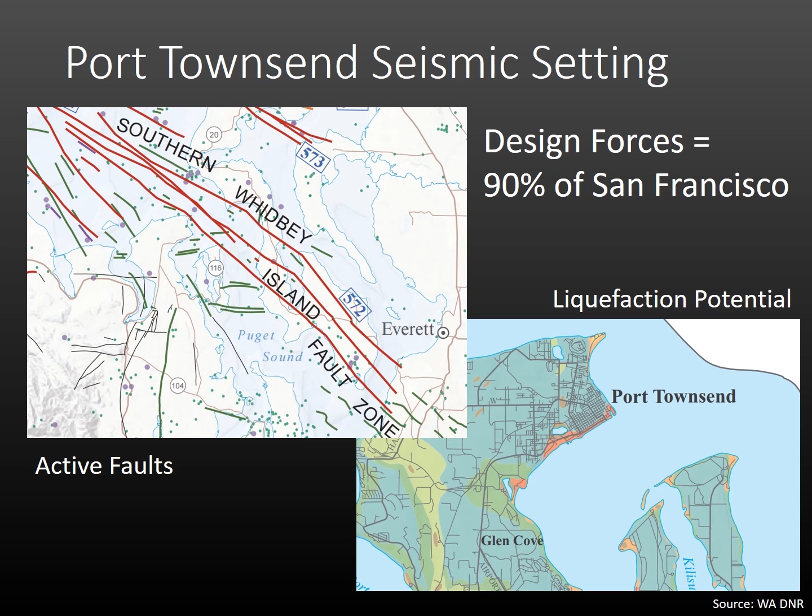So red tag means that after an earthquake, building officials, engineers, and trained professionals will go around and look at buildings and apply either a green, yellow, or a red placard. And just like on your stoplight, green means the building is relatively undamaged. You can continue to use it. Yellow means that you can only go in under certain conditions. Maybe it's just to go in and retrieve some belongings and come back out.

But red tagged, and I'll talk about this in the context of Christchurch, New Zealand, red tag means that you cannot use the building any longer. So if that's your residence, your place of business, that's a big impact.

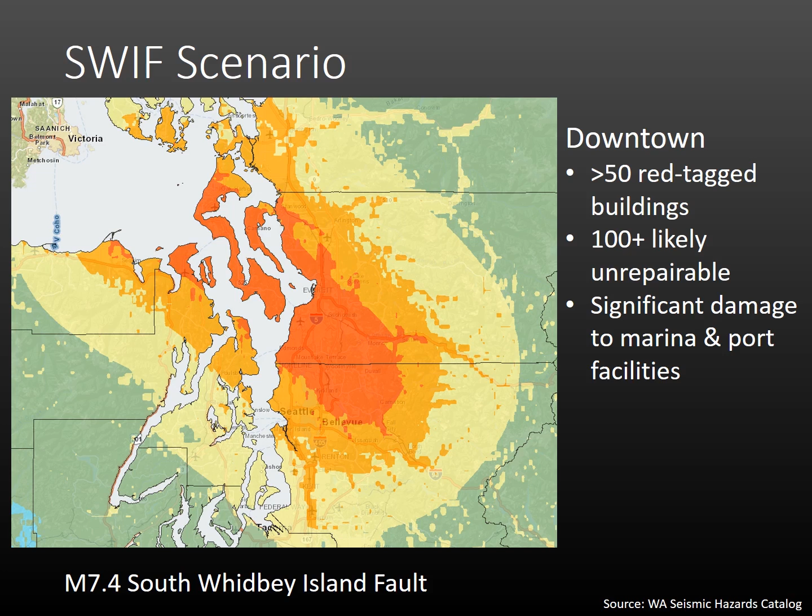A couple of the other presenters also talked about Nisqually. So I just wanted to kind of provide a frame of reference for those of us that were here at the time. I actually wasn't. I moved here in 2003, a couple years after Nisqually. Even though it was a magnitude 6.8, Brian mentioned it's very deep. It was 50 kilometers deep.

This is not the big one. When we're talking about the big one, this is not it. We did see some damage. Some buildings in Seattle on poor soil conditions, or that had just the right combination of ground shaking and soil conditions, did see damage, but it was not widespread.

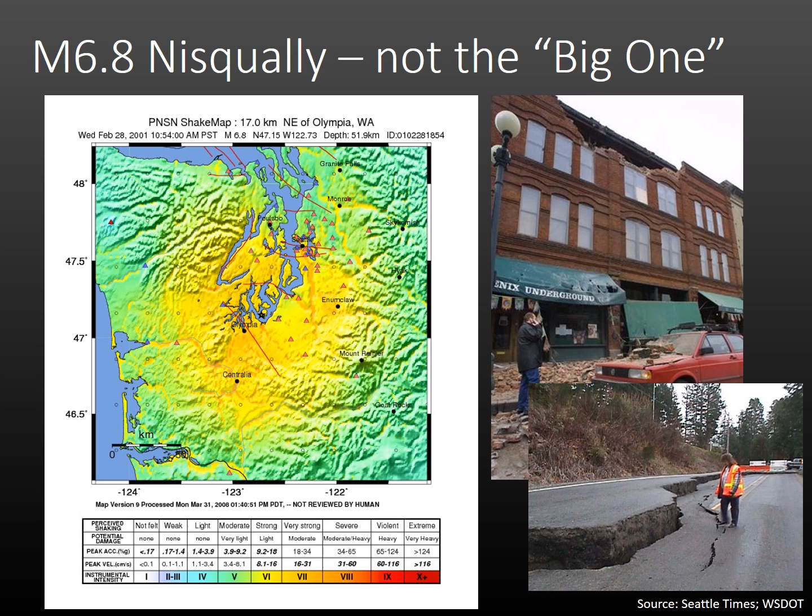However, if we take a field trip to Christchurch, New Zealand, and in particular the earthquake that happened on February 21st of 2011, you could consider this the big one. This is the big one for their central business district, for their downtown, for their city.

The effects are not as widespread as we would see from a Cascadia subduction zone, but I think this is a great chance to see how some of the buildings performed in that event and how it's impacted their recovery, how it impacted their region.

So this was technically an aftershock. In September of 2010, about, I think it was 30 or 40 kilometers to the west of Christchurch, there was a larger earthquake. It was magnitude 7 or 7.1, something like that. So that's what defines this as an aftershock, because there was an earlier event that had a larger magnitude.

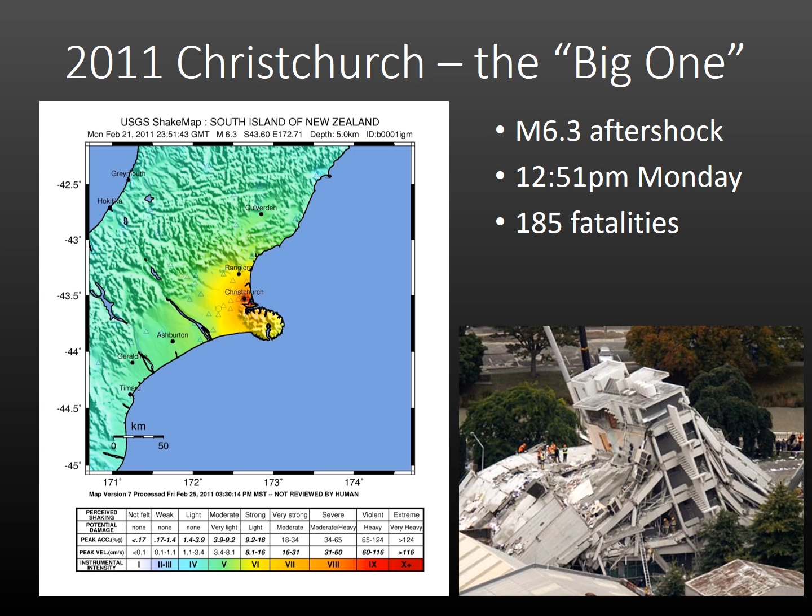No, this is not flooded. This picture was taken, I don't know the exact date, but this just shows that on this bare land there used to be buildings. 75% of the buildings in downtown Christchurch have been or will be demolished. I think probably by now the ones that were damaged and going to be demolished have been demolished. The financial impact is estimated at $30 billion US.

Christchurch and New Zealand were heavily insured, so a lot of this money is coming into the country from global reinsurers. It's provided a little bit of a boost to their economy because all that money is coming in, but this is a massive effort.

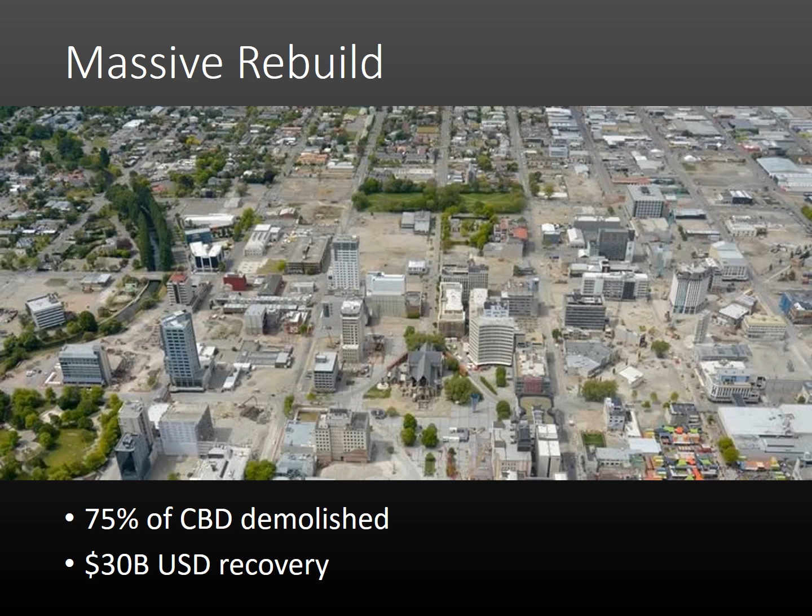So my company sent a team of 6 engineers to Christchurch. We do a lot of seismic design and earthquake engineering, so one of the best ways to learn is to go and see for yourself. This is almost a real laboratory for us.

We were in country for about a week, and we arrived approximately 10 days, or maybe about 2 weeks, after the earthquake. So some of the cleanup had already happened, but there were still a lot of buildings, and we could see how they performed, what worked and what did not work.

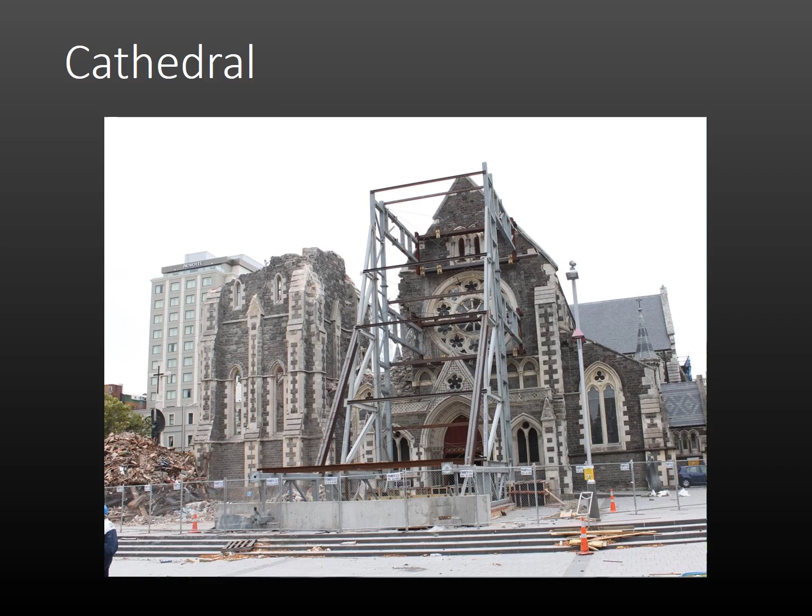The building had experienced a little bit of damage in the September earthquake, so I believe these shoring towers may have been put up before then. Some buildings had some damage, and they had put up shoring towers between September and February. But this is what we found. Here was the spire, and off to the side is what remains of the spire.

My understanding is the building is still pretty much intact. We saw that from the picture a couple slides ago. They're still trying to figure out, do they rebuild? How do they deal with this? It's a big cultural heritage site for them, so it takes a long time to sort through those decisions.

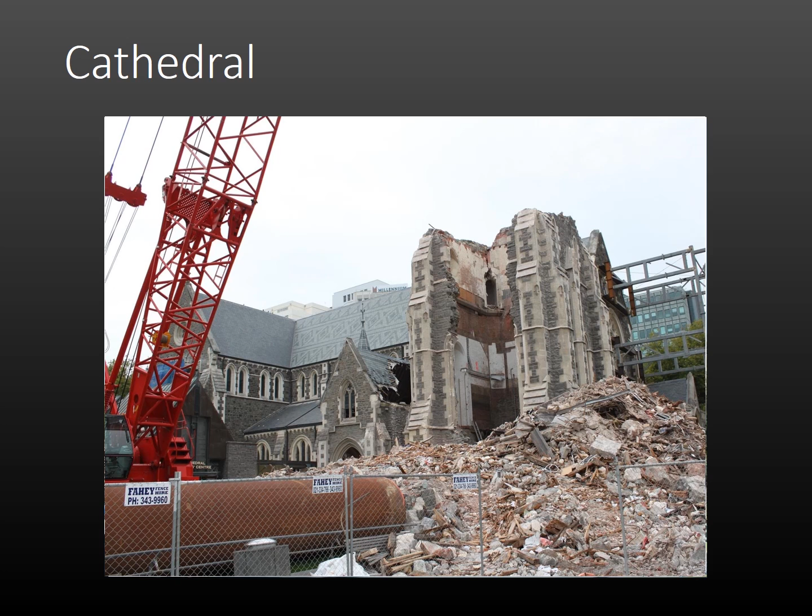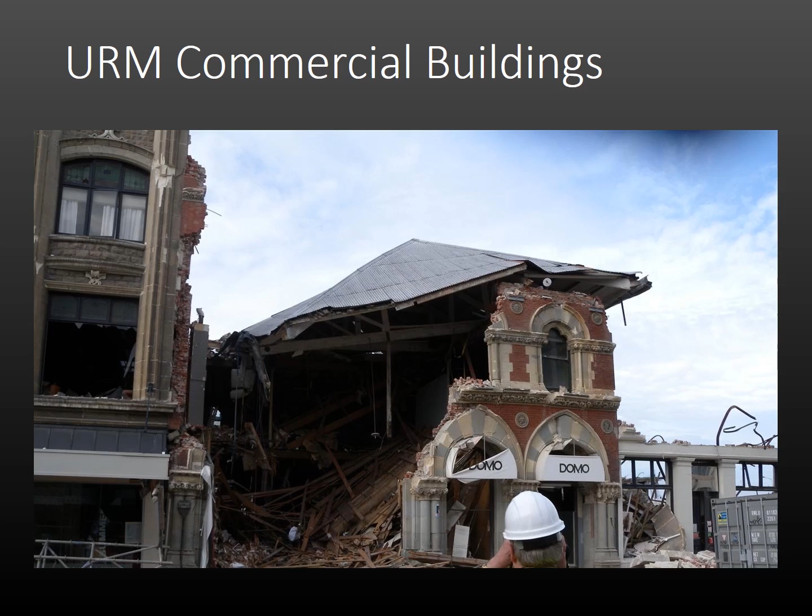Here's another example. Again, this is kind of the before view taken from a street view, and then when we arrived, this is what we saw. Obviously, there were probably some awnings that were hanging on here, and the streets had been cleared away, but you can get a sense of the storefronts, the defining features of these buildings have been severely damaged.

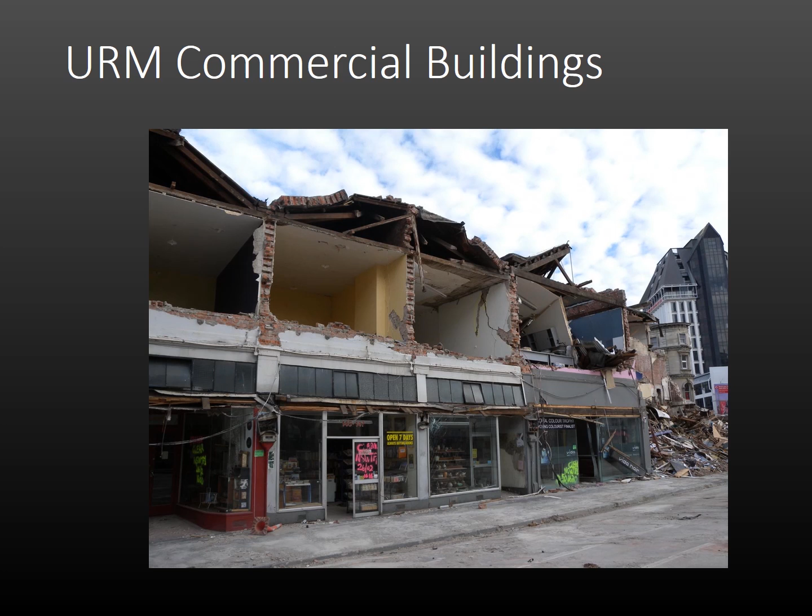Another construction type is reinforced masonry. A lot of schools and low-rise commercial type buildings are constructed using reinforced masonry. So this is kind of the H-shaped blocks that are hollow. They stack them up, they insert reinforcing, and then grout them solid.

This building actually performed reasonably well. I mean, it allowed the people to get out. It did not collapse. You would say that this all generally meets the intent of the building code, because the building code is all about life safety. Of course, this building is not economically repairable, so it was one of those buildings, part of the 75% of the downtown that has been demolished.

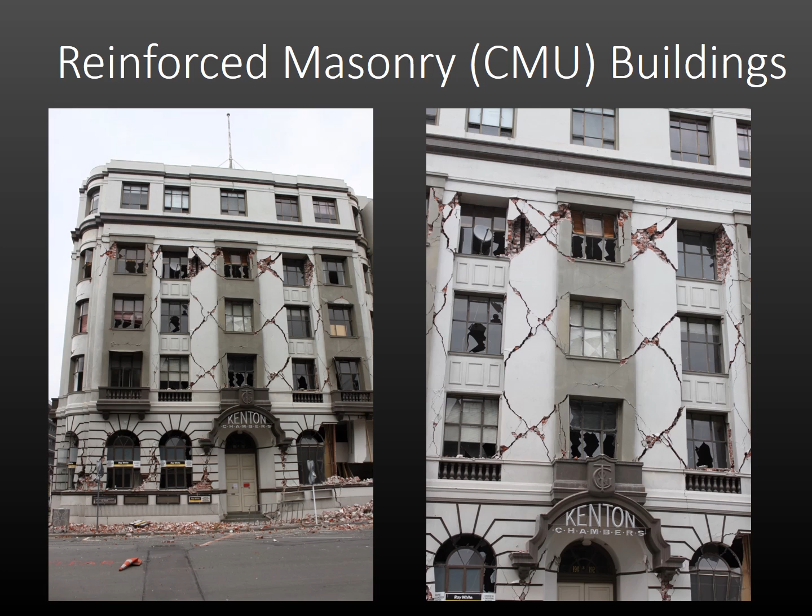Concrete buildings. Christchurch has a very strong and robust concrete industry. One of the poster children, though, for the Christchurch earthquake was the CTV building. I don't know all the details. Apparently there were some design deficiencies. It was built in the mid-1980s, so typically we would think that a concrete building built around that vintage should perform pretty well. But as you can tell, 115 of the 185 fatalities were just in this one building.

If you're following the news, the city of Los Angeles, I believe they are about to, or they've already passed an ordinance dealing with what are called non-ductile concrete buildings, older concrete buildings. And this is the reason why. These are really the killer buildings because they're larger, they house more people, they're heavy, and when they collapse, they tend to pancake, and they trap people, so they perform very poorly. They're a big risk to the public.

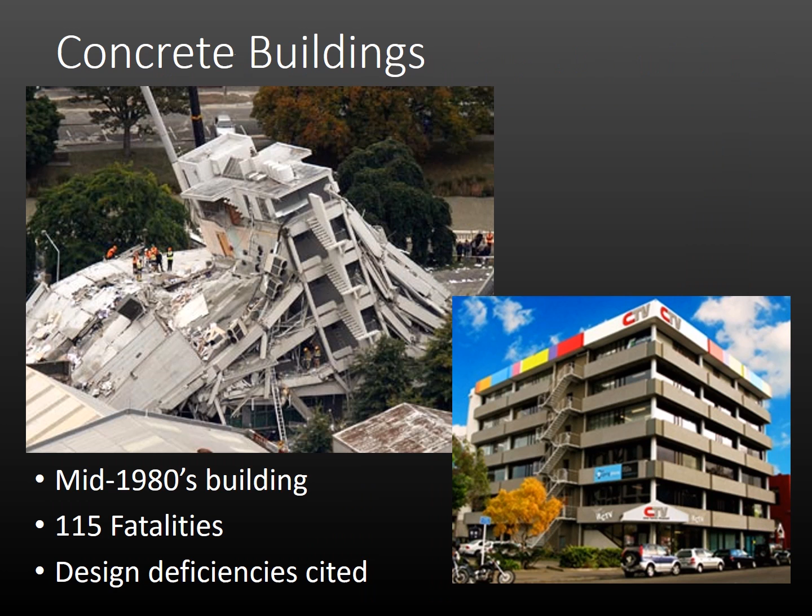Interestingly enough, Christchurch does not have a very large inventory of steel buildings. My understanding is there was a labor dispute at one point with iron workers, and structural steel as a design material kind of fell out of favor. However, I think some more recent buildings are being built out of structural steel. Typically, we expect these to perform pretty well, and we saw that when we were down there.

So here, this is a shopping mall just outside of that central business district. These are pictures that we took while we were there, so the mall was operating. And you can see, here's the steel framing. We couldn't tell if there's even any damage to it.

This was a reinforced concrete parking garage that had been retrofit with steel brace frames, actually a similar configuration to this. There's a little bit of distress, a little bit of yielding on the steel, but the building was standing, so it performed very well. So really the majority of the damage we saw were those unreinforced masonry buildings and a handful of concrete buildings that performed poorly.

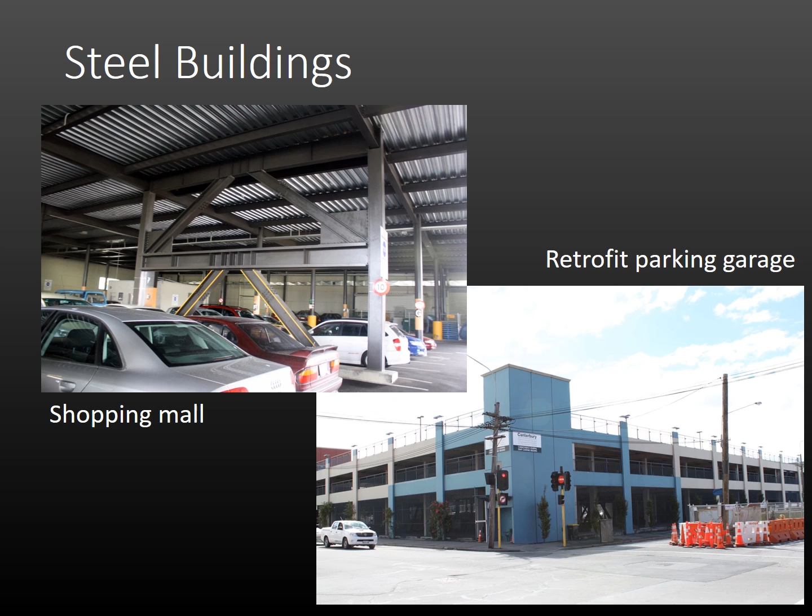So we'll touch on a couple of other building types or more building functions. So the hospitals in Christchurch, or in New Zealand, similar to practice here in the United States, hospitals and other essential services like police stations and fire stations are designed to higher design levels. We understand that hospitals are designed for about 75 to 80% higher than a normal building.

This is kind of a cool building from an engineering standpoint because it uses a technology called base isolation. This is the women's hospital. The whole building sits on these rubber bearings. The bearing essentially acts as a shock absorber, you could think of, or allows the ground to move below the building without transferring that motion up into the building. This was operational when we were there. We understand it remained operational during and after the earthquake.

The only damage we could see is, since this building is going to move around quite a bit, 1 to 2 feet, there's a moat all the way around the building, a separation. That's kind of what you can see, this gray line here. There are these metal covers that bridge across that. This is the only damage we could see to this building. So well-designed, well-constructed buildings can do fine even in the big one.

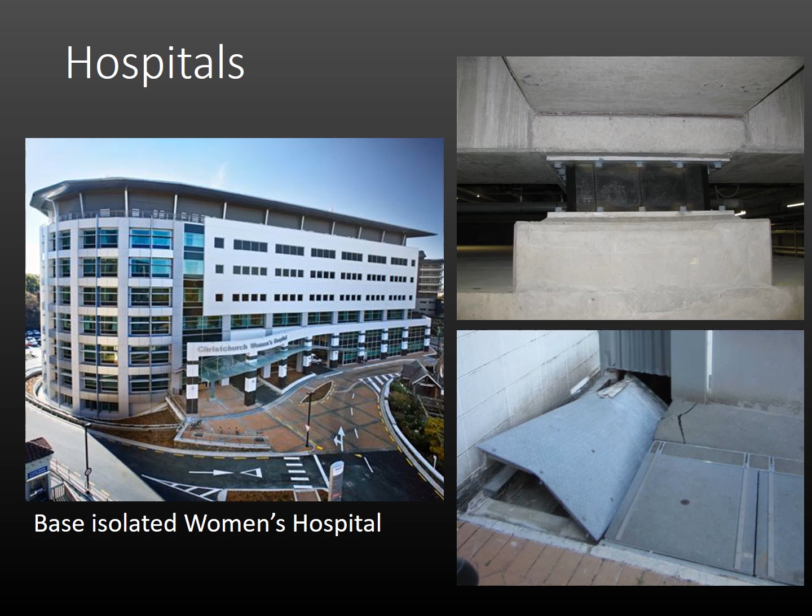We did get a chance to see a couple of residential buildings. Most of our focus was on the commercial type of construction; that's what our firm does predominantly. However, we did get a chance to look in some of the neighborhoods. So here, this is similar construction that we would have here in the United States. It's a timber-framed or wood-framed building with a brick veneer.

This is an older building, so it has lath and plaster ceilings and walls. And you can see the amount of damage. This residence was red tagged. We were inside of the building. We should not have been inside of the building technically, but we did not feel that there was a risk because we know how these buildings perform.

They red tagged it because of the apparent damage. The house is still standing, but since it's red tagged, the homeowner cannot stay in their house anymore. So that's something maybe Bob will talk about. How do we handle these people that are displaced from their homes?

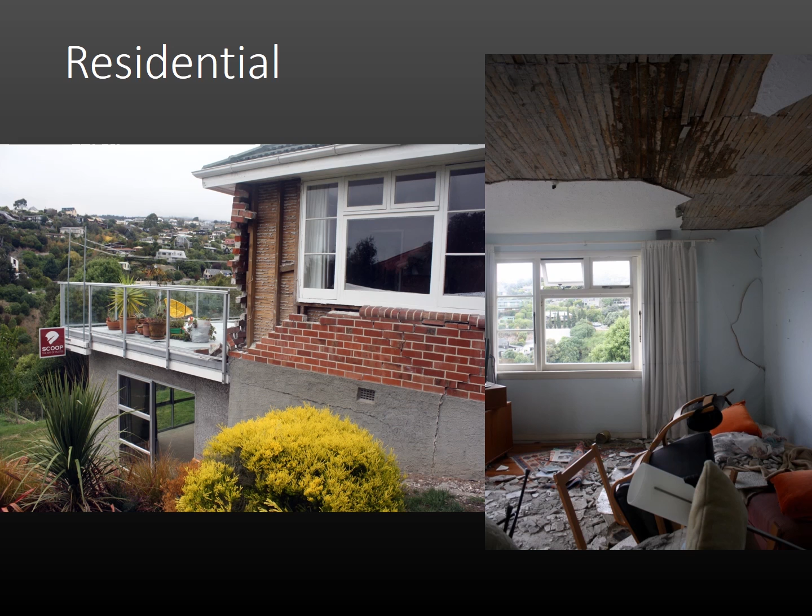Okay, this doesn't show up super well, but one of the other major stories from the Christchurch earthquake is the amount of liquefaction that happened. It was widespread. It caused buildings to settle. I think some of the buildings that were demolished are ones that had differential settlement, so basically the buildings were tilting over, and they couldn't re-level the buildings. So even though the rest of the building was okay, because of that liquefaction, they've had to demolish them.

But one of the stories, and this I think relates more to land use planning, is there were many, many residential neighborhoods that were built along the banks of rivers and in other locations that are susceptible to liquefaction. These all experienced ground deformations, failures of below-grade utilities, think water lines, sewer lines, and there's at least 8,000, I think I've heard numbers of even up to 10,000 homes that are in these red zones that are in the process of being bought out. They are not going to reoccupy those red zones because of the potential for future liquefaction. It's just not economically viable to go in and replace all of those utilities.

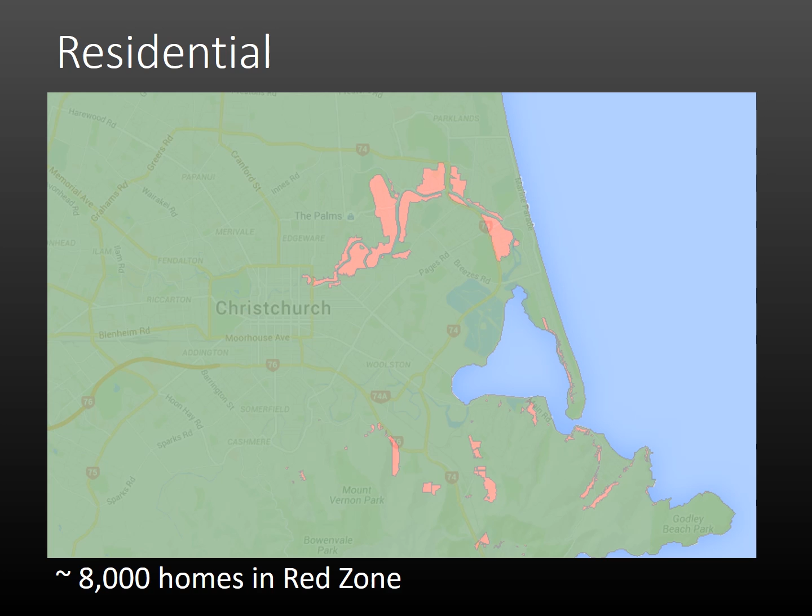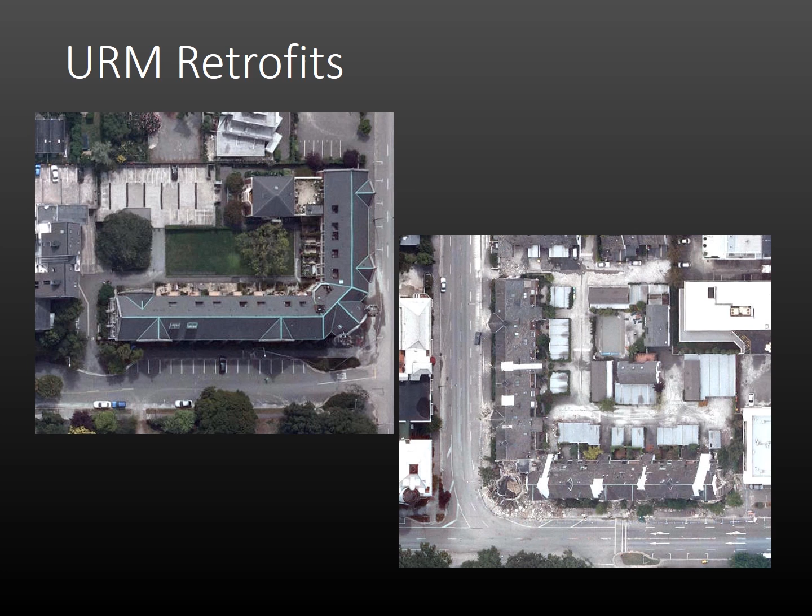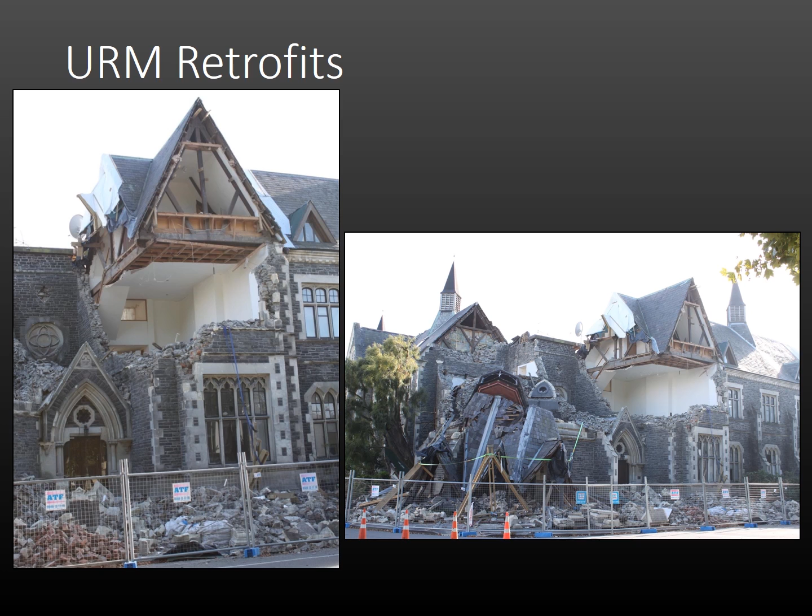The one on the right, especially right at that corner, in between those two wings, there were some architectural features there. You can see that it basically experienced collapse of the upper floor and really a lot of damage. I'm sure this building was also demolished afterwards. And then you can compare that to the building just a block away that has evidence of retrofit, of being strengthened. And I've got a couple closer pictures here too.

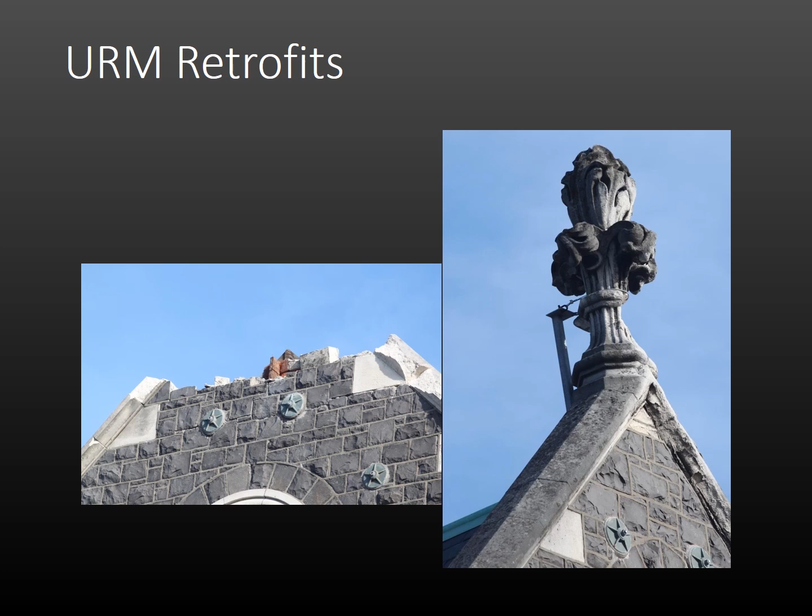Coming back, this is the heritage building that I showed you in that satellite image, right next to Christchurch Cathedral. We understand the story behind this. This is a government building and had been extensively retrofit up to a very high standard. We couldn't see any damage to this building. And you can see it's right on that Cathedral Square. Buildings all around have been demolished, and this one's still there. This is probably a very expensive retrofit, but it can be done.

So I want to come back a little bit closer to home, and I'll tell you why the courthouse is one of my favorite buildings in town. My firm has worked on the building for about the last 10 years, working with Gordon Ramstrom in the county on an incremental seismic upgrade of the courthouse.

So you may have seen this, all of these buildings, the failures typically start at the top. It's all about how are the walls tied to the floors, especially how are those walls tied up to the roof level. So if we don't have the funds to strengthen the whole building at once, it makes sense to start at the top and work your way down. And that's what we've done working with Gordon on the courthouse.

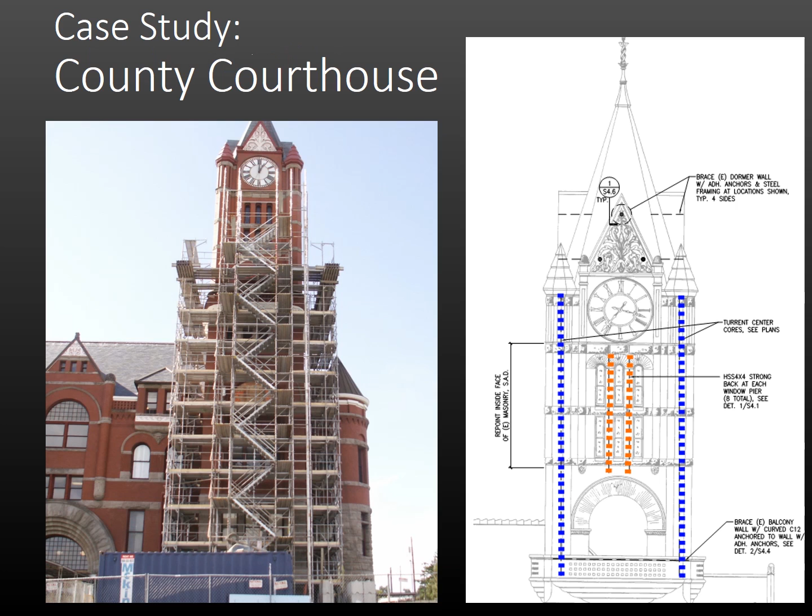In addition, we're looking at details like these little strips of masonry in between the windows, the things that are really susceptible to damage. So, looking at the details, I didn't sketch it on here, but added some strongbacks, added some steel angles around the clock faces to hold those in place as well. So that was the first phase. I think that was completed in the late 2000s.

And then, actually, at the same time that I went down to Christchurch on the reconnaissance trip, I was working on a subsequent phase. We'd already done the clock tower. Now we were working on the walls around the perimeter, the walls in the attic. And I saw buildings just like this. And as I was designing this and laying this out, thinking about, okay, what did I learn in Christchurch? So even if there's anchors up here, we've got to reinforce around these openings. Got to make sure that there's a load path there.

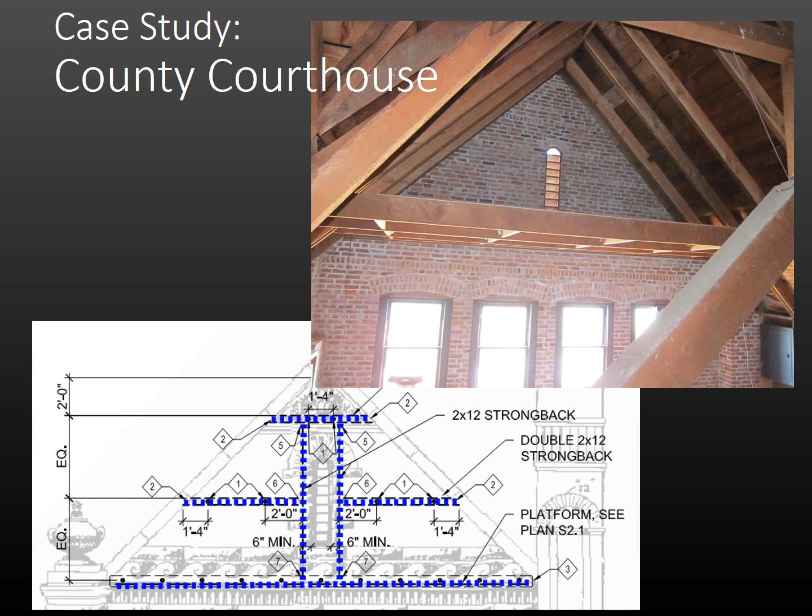So this upgrade was performed with the intent of meeting the proposed unreinforced masonry retrofit ordinance that the city of Seattle is working on. And this would be kind of the minimum level if that passes. San Francisco and a lot of Californian cities have already passed similar ordinances, and this is the intent of it.

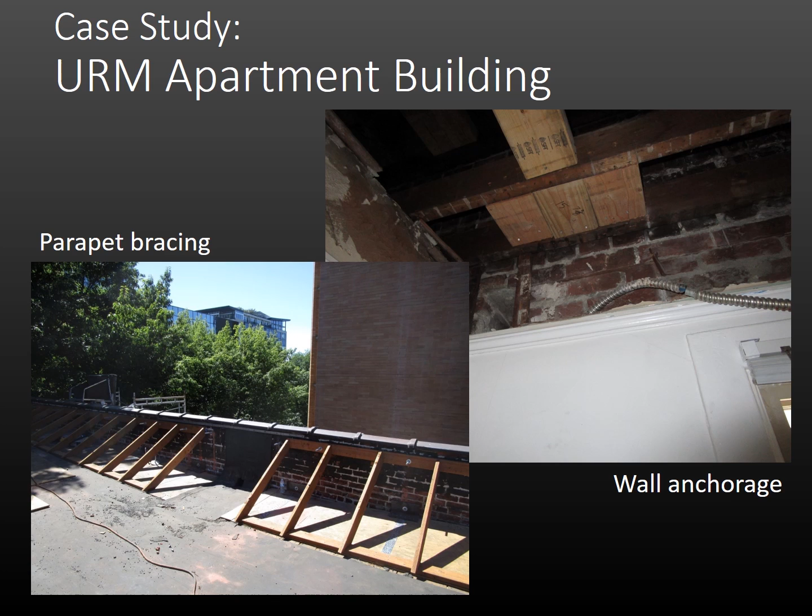So just a couple of closing thoughts here. Especially in a place like Port Townsend, the beautiful historic buildings really define the community. I recommend thinking about how do we protect those so that we don't have the case like Christchurch where you're seeing large portions of a downtown region being demolished.

Bob will probably comment a little bit more on this, but thinking about as a region, how do we recover? It's making sure our school children are safe, making sure that schools are a safe place for the students to be, thinking about essential services, hospitals, police, fire stations, all the things that we need to recover or respond right after the disaster. Think about the economy, what keeps the region going.

I think one of the other lessons from Christchurch is to consider geologic hazards in land use planning. Don't build on liquefiable soils if you can avoid it and if you're aware of the hazard beforehand.

And I guess assuming we are toast, what goes good with toast? We better get some jam. We're going to need something to eat, so yeah. All right, that's...